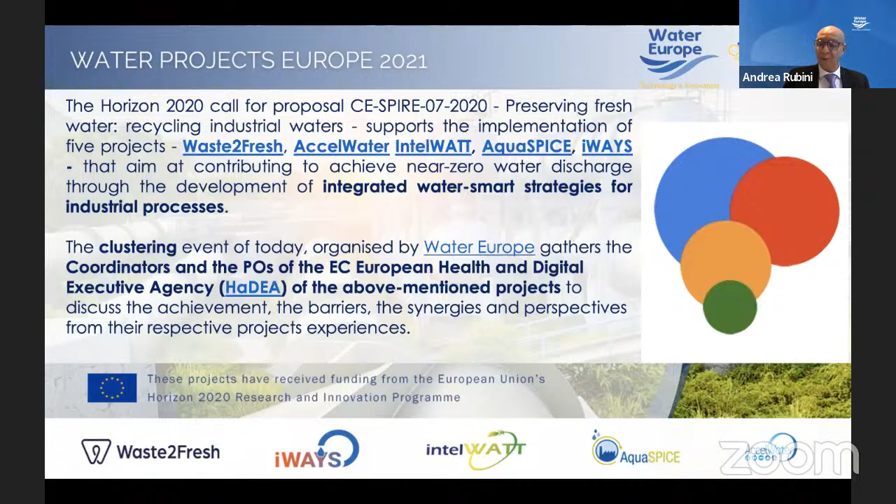This is a snapshot of the speakers that we are going to have today. A very quick tour across the agenda: we have part A, where we introduce the topic, with a presentation from HaDEA and a keynote speech from Ludo Diels. Then we have part B, dedicated to presenting the 5 projects, from AccelWater up to Waste2Fresh. Then we have a final part C, a panel discussion on synergies, common barriers, possible developments, policy implications, and questions and answers that can come from the audience and from all the panelists.

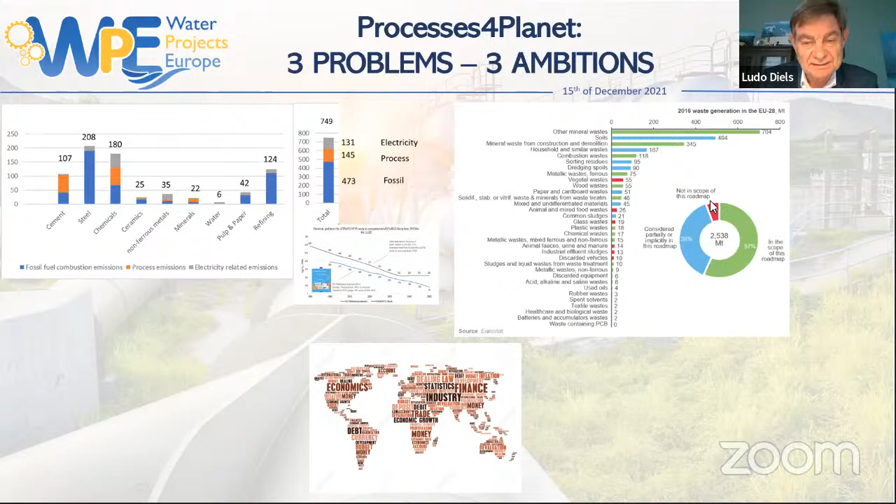The first one is the fact that we, as an energy-intensive industry, are responsible for more than 750 million tons of CO2 in Europe. Our ambition is to bring that to climate neutrality, to completely remove these emissions.

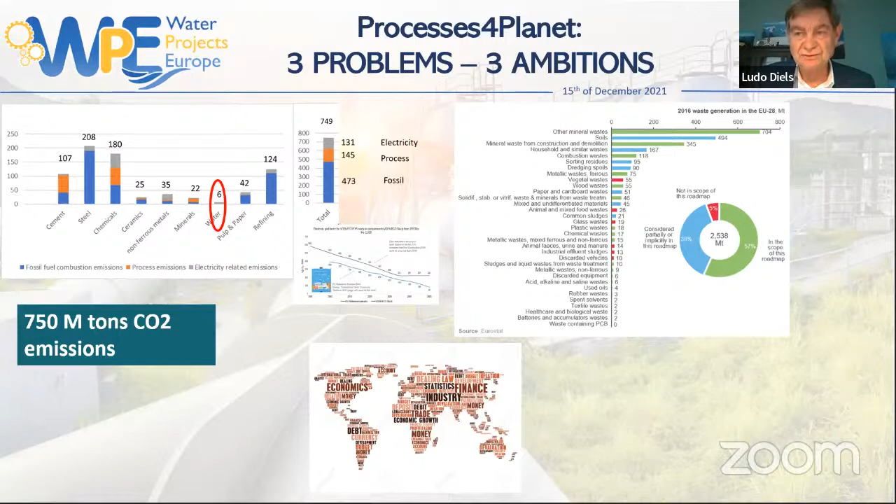When we look to water, this is a tricky calculation, but in our SRIA we have that about 6 million tons of CO2 are linked to the electricity used in water treatment. We also must not forget that in a lot of situations of water treatment, we emit so-called process emissions, producing CO2, nitrous oxide, etc. This is extremely important for us, and in every project we would like focus going both to energy reduction and to changing water treatment so we have fewer emissions.

The second point is that we try to use at least 50 to 60% of the waste generated in Europe as secondary resources for us. It's extremely important that we can use this waste and bring it back as a secondary resource, and not leave it as waste.

Speaking again about water, we have to take into account about 13 million tons of industrial effluent sludges and about 10 million tons of sludges and liquid wastes coming from waste treatment. That's certainly the minimum, but this can be reused either as feedstock for materials, or as feedstock for our energy consumption.

The third ambition is competitiveness. Our ambition is really that we stay competitive during the whole period of this transition, but at the same time that we create gross added value for the process industry that will grow quicker than the EU GDP. So really ambitious - we are not just willing to survive, but really to grow and go for a strong process industry in Europe.

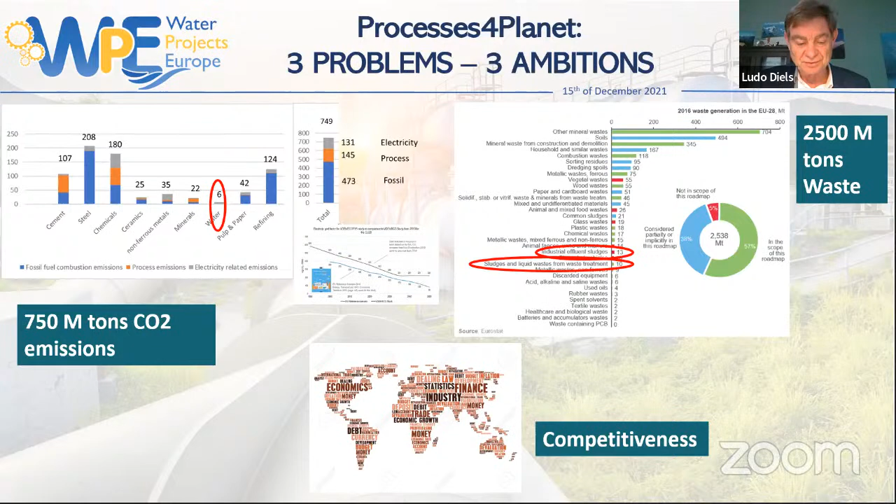When we look at the materials flow in our industry, we see that we use primary resources that, via the process industry, are transformed into materials. This is used by the manufacturing industry to make products, and then as a consumer we bring it to end of life. Then via the recycling industry, it goes back to the process industry as secondary resources. Of course, we interact as a process industry at several levels of this process.

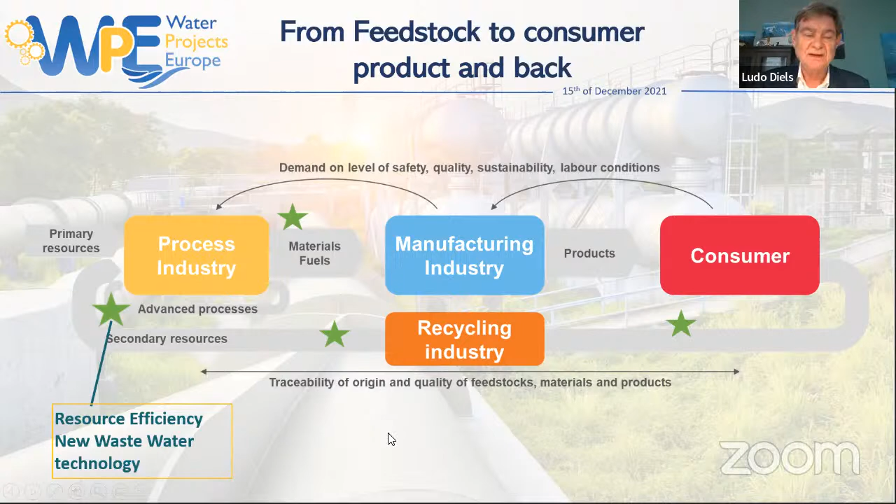Speaking about water, for us the recycling of water in advanced processes with resource efficiency - where we also recover resources, including energy, and try to recycle the water - is most important. Also, secondary resources coming from the recycling industry are in many cases making use of water for cleaning, for washing, etc. We would like to see this link made very strongly so that we can really close this water circle.

If I can translate that into challenges, up to now in water treatment in general we have a lot of attention to oxidative processes, but not that much to reductive processes. And oxidation always needs a lot of energy, so it's certainly a point to take into account.

Up to now, there is still a limited amount of water that is really recycled in process industry. So there's a long way to go, and we really look forward to nice projects where we can improve this potential.

Needless to say, nutrient recovery - for instance phosphorus, due to the scarcity that is coming - but also energy, due to the fact that there is a lot of nitrogen linked to the energy, since we need a lot of energy to make it, is extremely important. In general, I can say that solutes recovery - chemicals, metals, including CRMs, but also salts, etc. - are key if we want to close the circle in a circular economy and keep our feedstocks.

In addition, it's important that we can also remove toxic elements out of the system. We do not want to go to a circular economy where we circulate also the toxic and hazardous compounds. This must go out and go into a safe sink in a certain way, and not be kept anymore in the circular system. Also, fit for use - an expression coming from WSSTP - is really important.

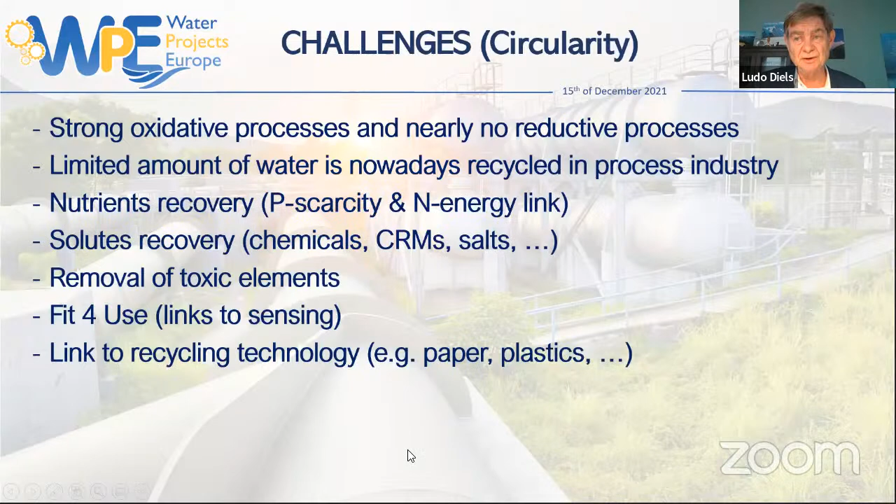We make a lot of links to sensing, to understand what kind of water quality we need in our processes, and to sense the water quality so that we can optimize the treatment according to our processes and avoid risks in the processing itself. And finally, we have a link to recycling industry, for instance in paper recycling, but also in plastics recycling, etc., where a lot of water is or will become used. That really makes sense for us as well.

If we look at energy, of course energy is extremely important for us, but taking into account water, energy efficiency in the processes is of high importance because there we can really make a big difference. In that way, the reuse of excess heat in order to dry, to evaporate water, to increase solubility or whatever, really can make a big difference.

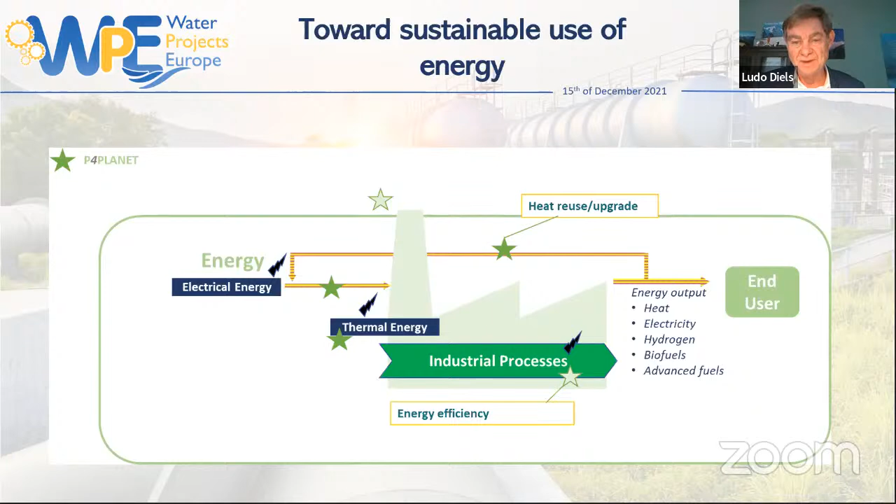Linked to that, more than 6 million tons of CO2 are emitted nowadays due to electricity use. Half is coming from aeration. Oxidation is done with air, which is not at all an energy efficient system. We blow too much air in our wastewater treatment systems, and of course we have a lot of nitrous oxide and CO2 that is emitted.

Again, I'd like to say that up to now we've focused on oxidative processes. This fit-for-use concept is important because there's also a link to energy use in water treatment. Here I'd like to make a case for the water-energy nexus, not only at the level of heat in the water, but also at the level of carbon-related energy. If we just destroy the carbon in the water and don't use it as an energy source, we will need a lot of energy.

We can calculate that we need about 1.5 kilowatt hours to destroy 1 kilogram of COD. You can also reverse it and produce 1.5 kilowatt hours instead. So this really can make a difference. Finally, process efficiency and intensification - for instance energy efficiency, dewatering, etc. - also makes a lot of sense in our different processes.

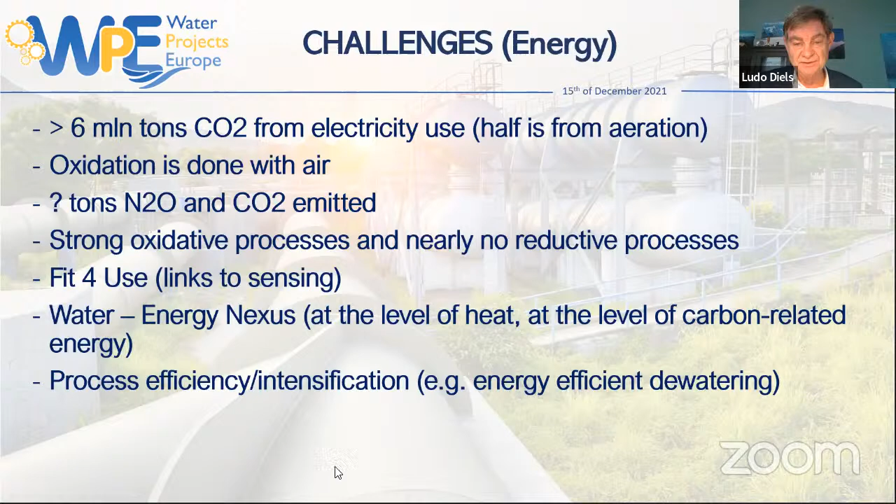As a third point, I'd like to bring up the hubs for circularity. In the hubs for circularity, we try to connect geographically close units to keep resources in the loop as long as possible. For us, that's really the basis of integrated process industry, of integration of all kinds of flows, and among them water is one of the mainstreams, maybe the easiest to keep completely in the system.

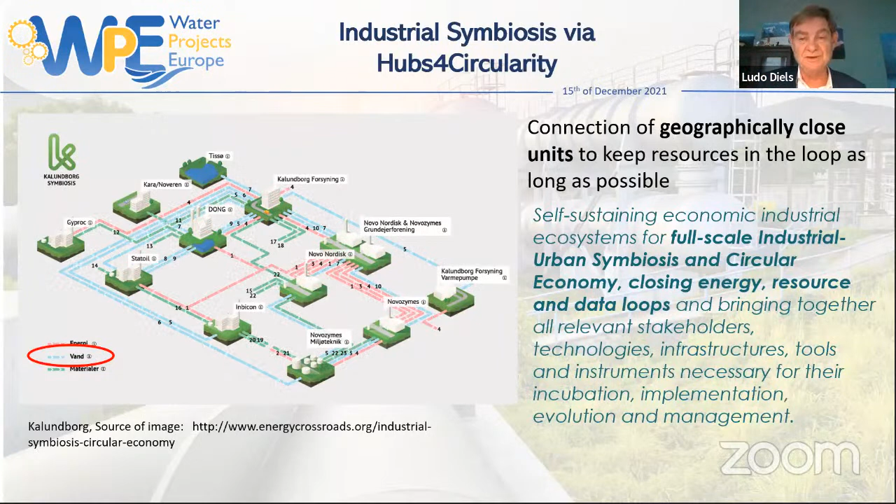With that, I'd like to show that we're not just looking per factory or per plant, but really looking at these integrated systems - industrial symbiosis in a cross-sectorial way, and not only cross-sectorial towards the sectors of P4Planet, but also to manufacturing sectors, recycling sectors, etc., but also the integration with urban industrial symbiosis. That's a point we really want to put forward, where we see a lot of potential to improve, maybe other forms of symbiosis.

The closing of the circle doesn't necessarily mean that we close one process, but that we close it in an integrated way. Of course, we have a strong need for integration with other sectors for waste heat, energy, integration of waste recovery, etc. So it goes further than just the sectors of P4Planet.

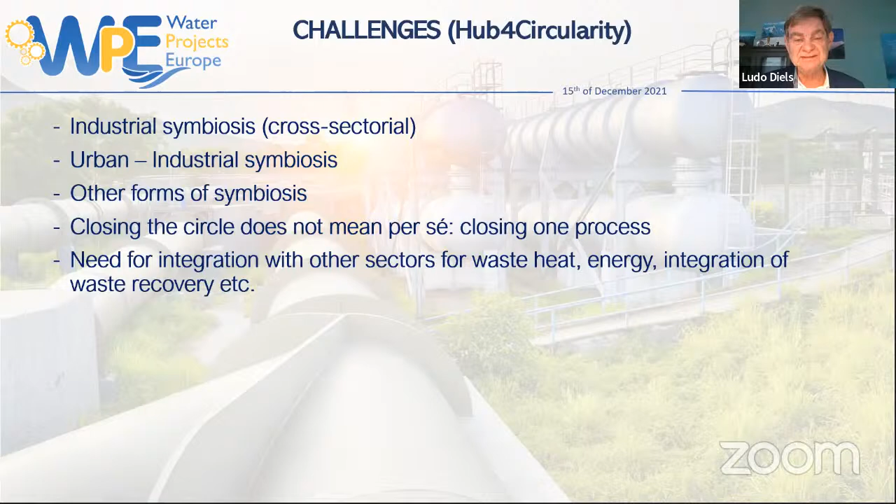Having said that, it's quite important to show you that the different projects now operating under the Spire call are really taking this into account. We see accelerating water circularity, innovative water recovery solutions via recycling of heat materials across different sectors, advancing sustainable and process industry towards digital and circular use innovations. This digital aspect is also extremely important. And intelligent water treatment for water preservation, containing...

...simultaneous energy production and material recovery in energy-intensive industries, and finally smart, innovative systems for recycling of wastewater and creating loops in textile manufacturing. Having said that, you already see we speak a lot about energy-intensive industries, but also food, beverage, textile, which are not sectors of P4Planet, but where we're really also looking at this integration.

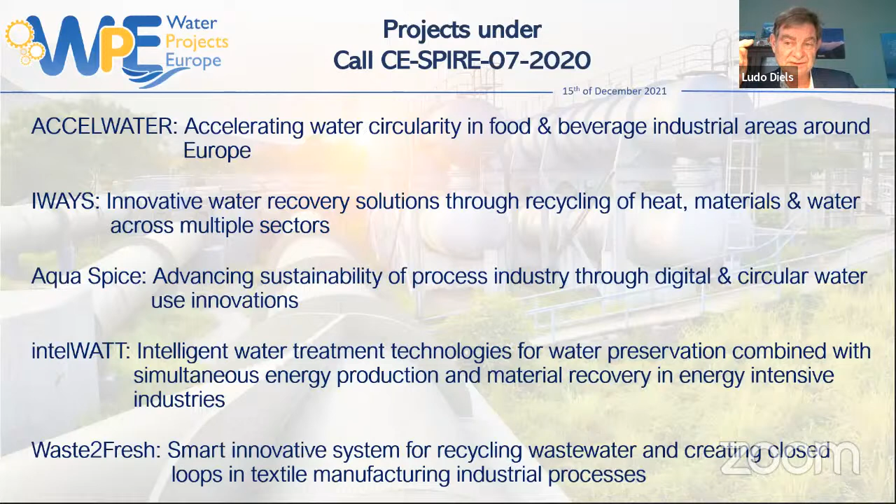Based on that, I can say that we are now preparing the work program 23-24. So for the future, we're still in a very early phase, but I'd like to give you a little glimpse of what we're looking for. We're looking really for sustainable and efficient industrial water consumption with zero pollution goals.

Really, you want to go to zero or near zero pollution, adopting more efficient production processes, with a lot of attention to smart sensing and monitoring. These digital approaches will become very important, including decision support systems for water reuse, risk management models, and recovering energy, nutrients, water, salt, and solutes.

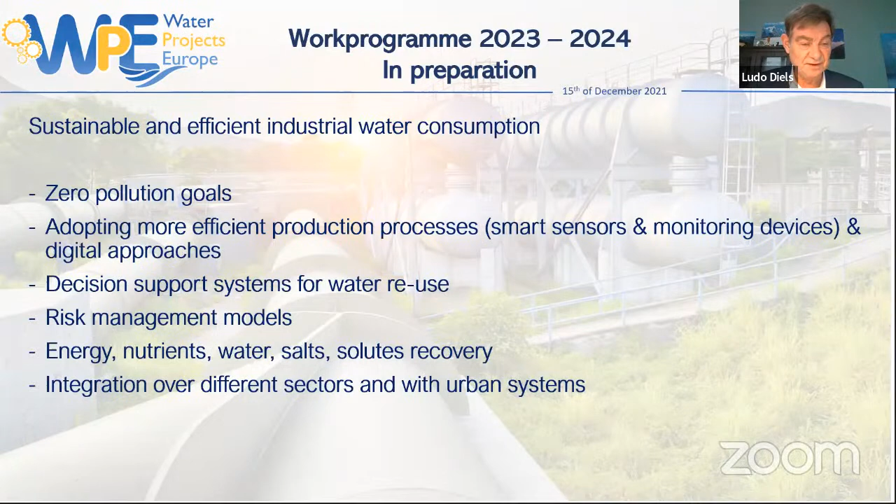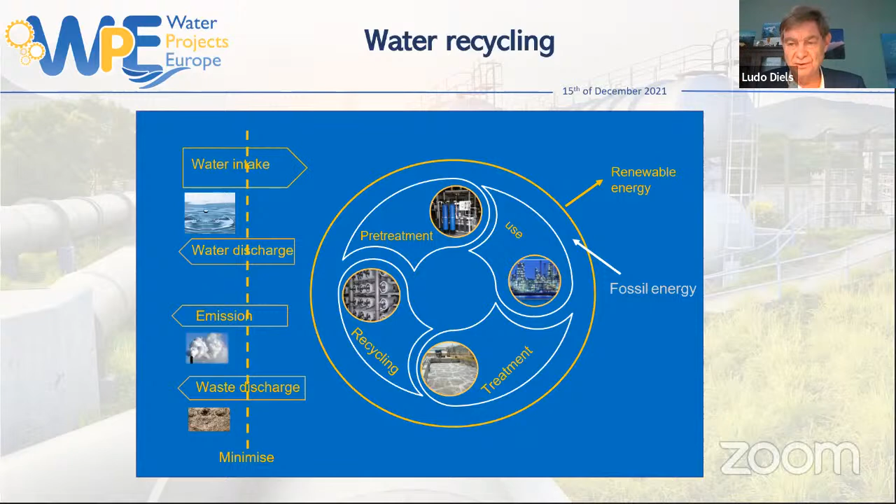Everything we want to recover in order to make our feedstock circles closed. And then we have integration across different sectors, also with urban systems. We want to minimize water intake and water discharge, minimize emissions and waste discharge, and go as much as possible toward renewable energy, reducing the overall energy we will need.

I would like to thank you for your attention, and I would be happy to answer questions or discuss further in the afternoon.

Because we advocate for having a water smart society. In this water smart society, collaboration and synergies is essential, and that's the reason we promote the program for the water-oriented living labs. Thank you so much, Ludo, for your presentation. Thanks a lot - I think there will be questions in the discussion session.

Now we enter into details of the projects, and I'm really happy to call on Tsiropoulos from ACCELWATER, coordinator of ACCELWATER, a project that aims at accelerating water circularity in the food and beverage industries. The floor is yours.

Thank you very much, nice to meet you all. Unfortunately COVID doesn't allow us to make this meeting in a physical way, so we will make it like that. And sorry about the mask, but this is the rules here in Greece that when you're at the company you have to wear your mask. So unfortunately I have to be like that. So let's go to the presentation.

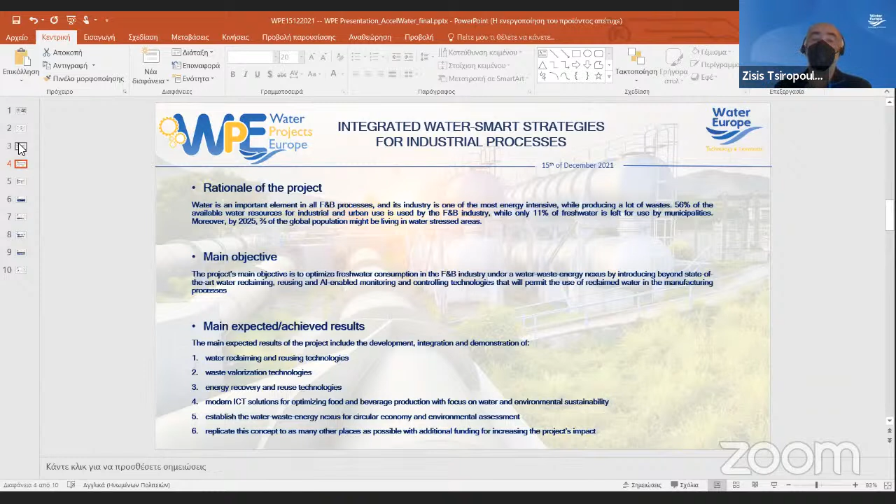We will establish the water-waste-energy nexus for circular economy and environmental assessment of our experiments. If we want to see what we are doing, we have 4 big pilots in 4 European countries.

The biggest pilot is in Greece, where 3 industries are involved: brewery, dairy, and the creation of superfoods. The second pilot is in Spain with a meat processing demonstrator, the third one in Italy with tomato processing demonstrator, and the fourth one in Iceland with fish processing demonstrator.

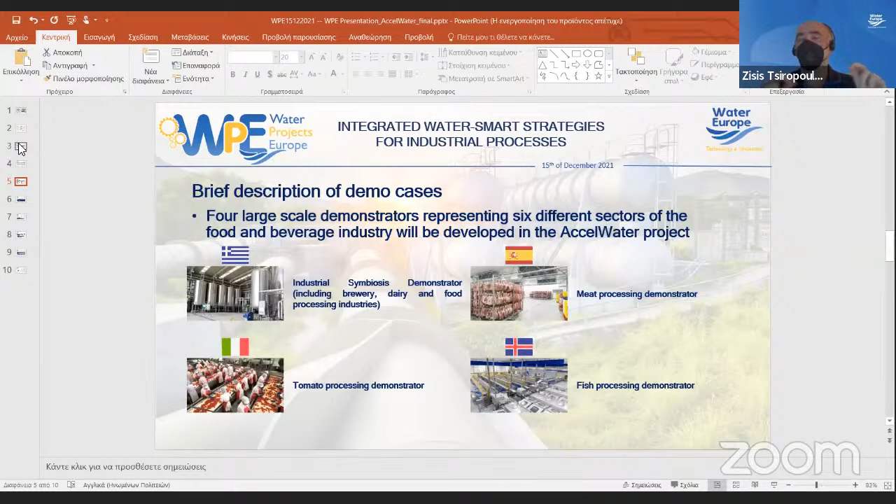We try to have all the types of food and beverage industries into the project, and I think we managed that, because we have 6 different sectors of the food industry.

If we want to see what were the enablers, I think the enablers for going into this project were all the new technologies being created every day. We're using technology for water reclaiming, wastewater management, rainwater harvesting, and for creating energy, etc.

But if I want to speak about the biggest barriers, at least for the Greek side, it's the bureaucracy. The governments are not ready, they didn't predict that such technologies would arise. So when we have to do this or that, we have to get too many agreements from the government in order to apply these technologies, because they don't know what we are speaking of, so they don't trust them.

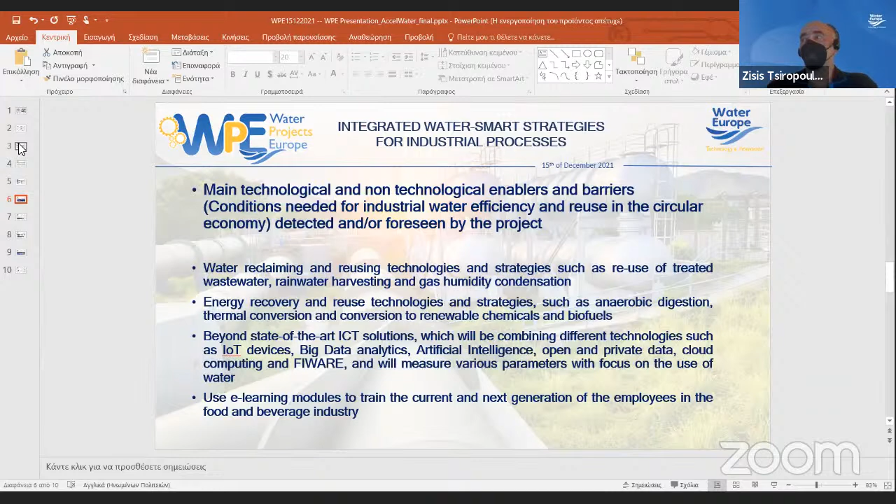They have no clue what will happen. So the difficult barrier for us is to try to convince them that this works and that it has to be included into the national strategy. This happens a lot here in Greece, because we have the biggest site, so we have the most technologies that have to be developed.

Regarding the Green Deal that the European Union wants for 2050, I think the demonstrator targets are water and energy saving, reduction of processing waste and environmental footprint, creation of new products, and many more, but I'll keep it smaller and stay on that.

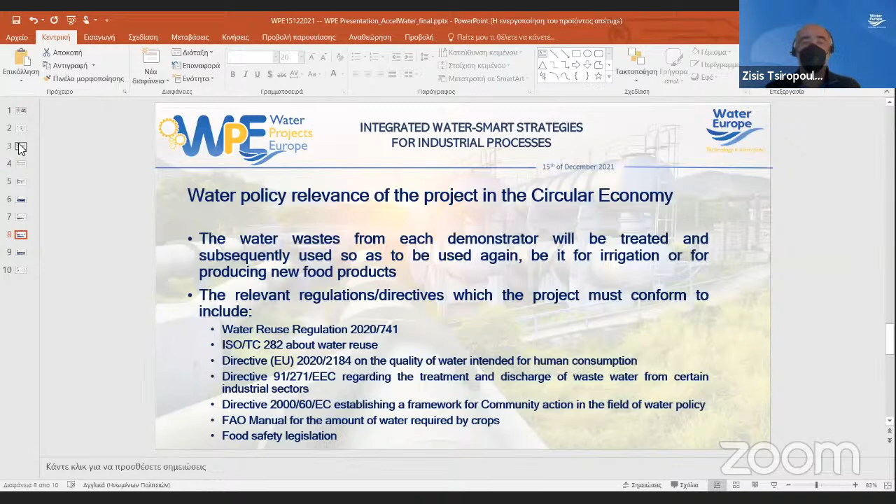These are some of the regulations and directives that we are using in the project. Of course, we have one country outside the European Union, Iceland, so it has some other type of directives and laws, but they are familiar with the European Union ones, so there is no problem there.

If I want to conclude on the project and what we've seen so far, because we are only at the first year, I want to say it's very interesting to see that the industries are very helpful in proceeding with the project and the ideas. They want to see these ideas realized, they want to become more environmentally friendly in general.

Because when you go into a Horizon project, which is mostly for research institutes, and the companies and food industry are not so experienced with that, you believe you will see some barriers. But we saw that the industries are very, very helpful, and they try their best to achieve the best possible result.

Moreover, because in the first year a lot of work was done creating the user requirements, we saw that in the food industry, most of the problems are common across all types of industry.

The third point is that we tried to find a way to optimize the project results and outcomes. We tried, in each country, to have at least one industry and one research institute. This helps the industries have the necessary support for applying these new technologies.

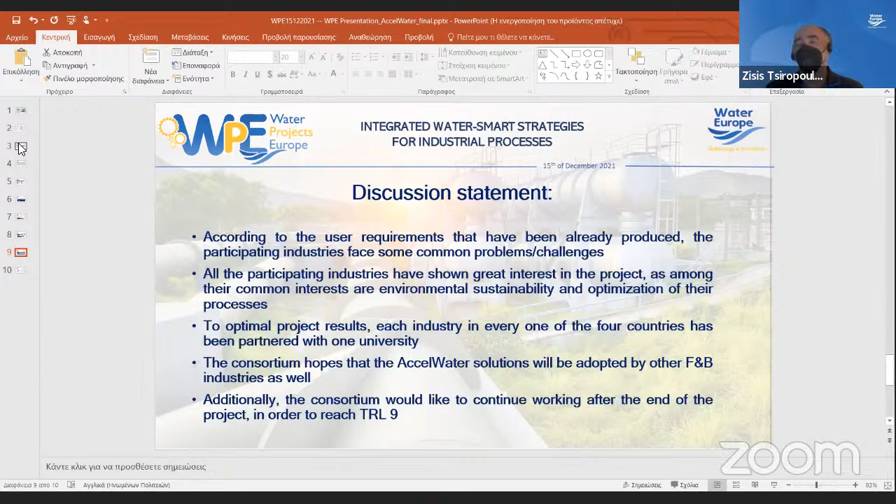That's all for me. I think I was on time, because we have very limited time.

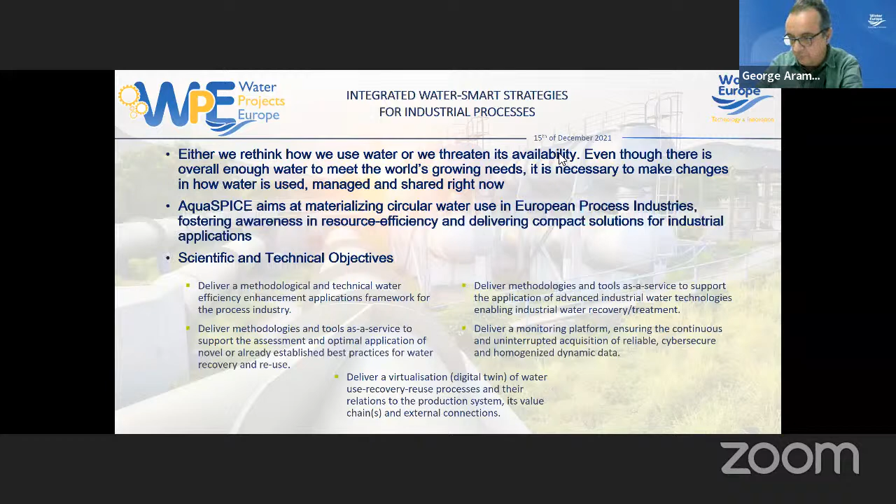AquaSPICE is driven by several business cases in the process industry, and its innovations are focused on the deployment and assessment of state-of-the-art water treatment and recycling technologies and practices, and then the concept of the water cyber-physical system, explained later in 6 case studies.

The first case study corresponds to 2 industrial sites of Dow Chemicals, one in Böhlen, Germany, and the other one in Terneuzen, Netherlands. This case mainly focuses on technological innovation for freshwater reduction.

The second case is in the peroxide production unit in Solvay, Italy. This is also a very interesting case because it also engages the local municipality and the consortium Aretusa wastewater reclamation plant, and there are actors behind that. So it's a case study which has a systemic view of the water management situation.

The third case study corresponds to the sustainable and robust water management in BASF, located in the industrial zones of Antwerp.

And it also has two sub-cases: one having the objective of reducing freshwater intake for demineralized water production, and the second one about real-time water quality, mainly salinity monitoring and control of the different water sources.

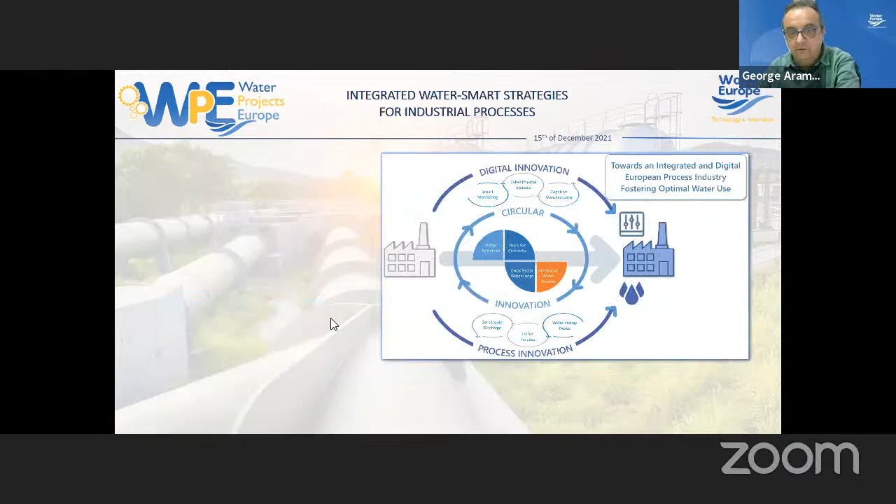AquaSPICE, as I said before, develops, integrates, demonstrates, and offers innovations in three different pillars: circular, process, and digital innovation. Process innovation corresponds to a set of advanced technologies and practices combining energy and substance recovery, where they are installed, operated, and assessed within AquaSPICE case studies.

The circular innovation is also very important, where closed loops, including the water reuse option at different levels—I'll explain that a bit later—in processing factory, industrial symbiosis, cross-sectorial cases, those closed loops are established and assessed.

It also offers digital innovation, where the novel concept of a water-specific cyber-physical system, which we call water CPS, is developed, synthesizing digital twins of the industrial value chains and of the entities for advanced water-saving technologies. Water CPS and digital innovation bring cognitive manufacturing methods and tools to the water domain.

The example developed in other cases brings this cognitive manufacturing for detecting non-optimal water reuse dynamically, leading to dynamic process adaptation.

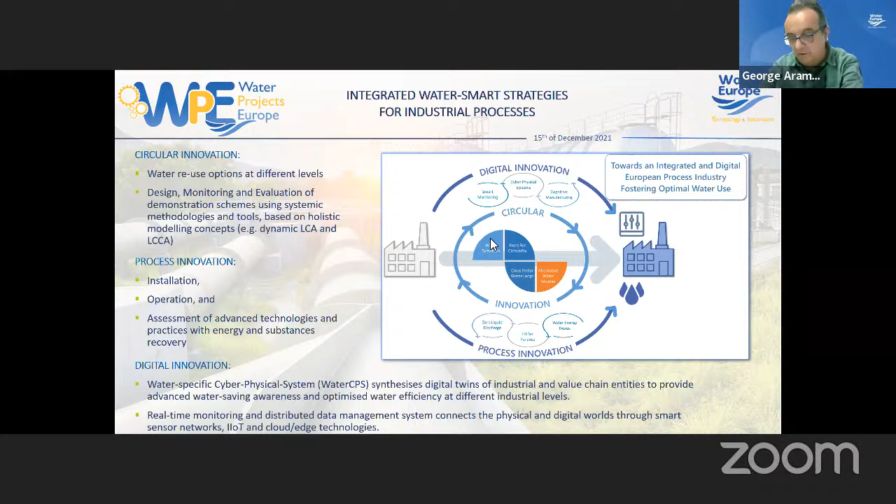Also underlying the water CPS, there is a real-time monitoring platform that connects the physical to the digital world through smart sensors, IoT devices, edge technologies, and all these things.

Some specific outcomes from AquaSPICE include contemporary water reuse practices and technologies, flexible decision support methodologies to assist in selecting, configuring, and optimizing fit-for-purpose treatment technologies, and assessment using different indicators such as water footprint, embodied energy, carbon footprint, etc.

Methodologies and tools to evaluate and monitor water symbiosis, because of the symbiotic actions there. Methodologies for more systemic analysis, including a novel dynamic life cycle assessment and cost assessment—dynamic meaning based on data that comes from the real-time monitoring platform and sensors, in a dynamic manner, not a static one.

In AquaSPICE, new business models are also offered, or will be offered, as we're still at the beginning of the project. There's a flexible real-time monitoring platform, and also the innovative water CPS, focusing mainly on the efficiency of water—that's what distinguishes the cyber-physical system.

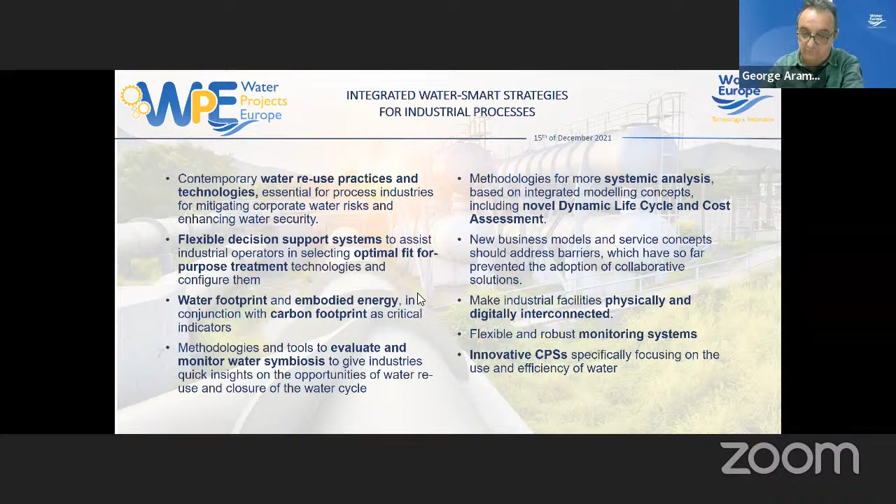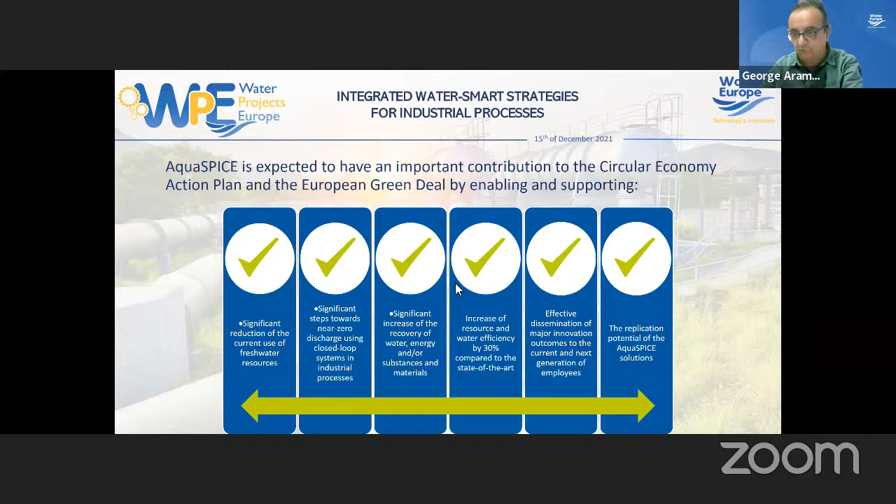Now, something about the circular economy and circular aspect of AquaSPICE. I mentioned before that AquaSPICE follows a systemic approach in water management and water efficiency, and this approach and efficiency can be achieved through adaptation of technologies and practices at different levels.

On the entire factory, as in case study 3, BASF in Port of Antwerp; in collaboration with other industries in an industrial symbiosis manner, as in JEMS in Slovenia, in symbiotic action with Agricola, as I presented before; and also in symbiotic actions with local industries that produce construction materials, where they use the slags.

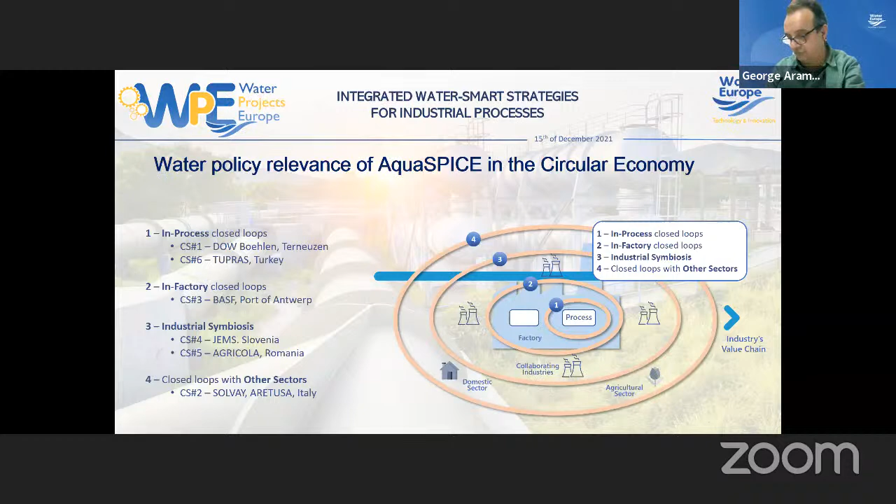Finishing my presentation, just a few statements, but also some outcomes that came during the first years of this project: the challenges are manifold and comprise improved utilization of advanced treatment options, including innovative biological process and membrane separation techniques to remove a broad range of pollutants. This is an outcome from the technological part, the process innovation, as I mentioned before.

The digital solutions may have to be developed and tested based on process models before they can be employed at full scale. Now we are exactly in this stage, and also in the stage where the real-time monitoring platform has been developed and will be deployed soon. Building digital twins of the industrial systems can help. It's important that we realize this, to appropriately assess the different intervention options in technical, economical, and ecological terms.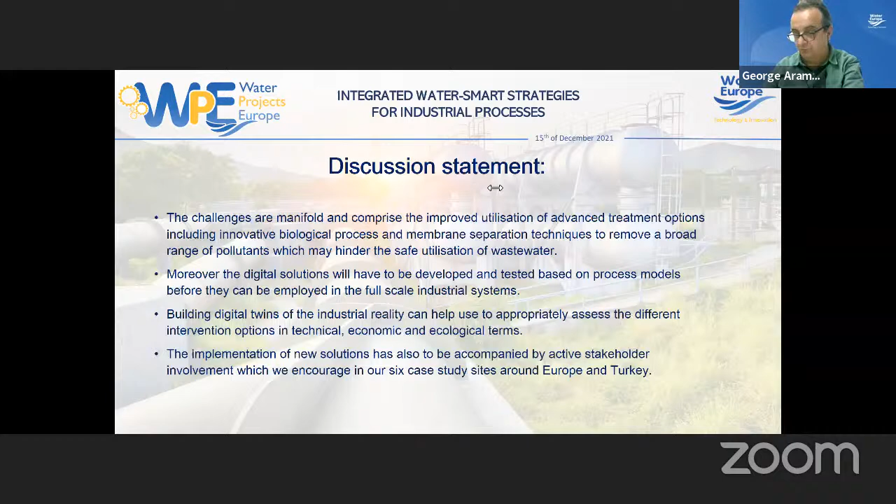What is important for this case, and I'm sure for other cases and projects, is that the implementation of all these solutions has to be accompanied by stakeholder involvement. This has been encouraged in all 6 case studies in AquaSPICE around Europe and Turkey. This is from my part. Thank you very much, and if there are any questions or discussion, we can do that later.

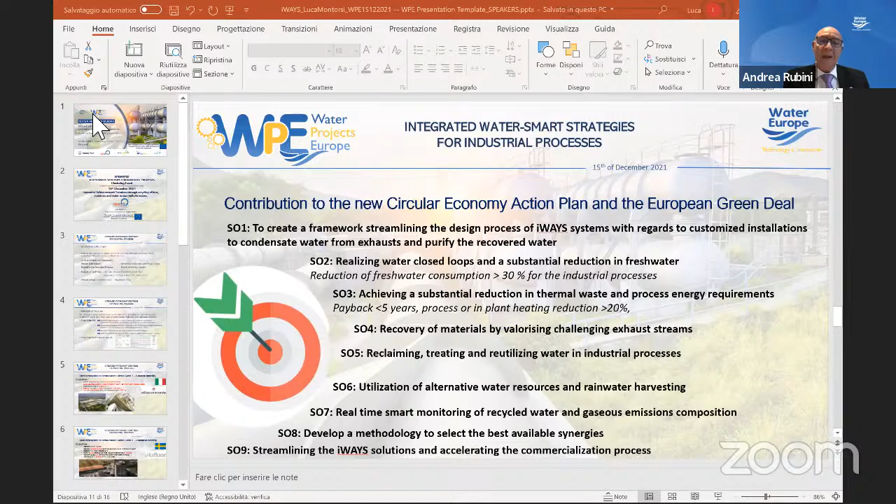Thank you very much, George. A real pleasure to learn from your project, from AquaSPICE. Now we have another project which is particularly important, which is iWAYS. This is a project where Water Europe participates, and it is under this project that Water Europe basically organized this clustering activity. I'm more than happy to see again, this time digitally, Luca Montorsi. We met during the last project meeting in Spain. Give us the insight of this project; we are going to listen to you. Thank you very much, Andrea, for the introduction, and thank you for inviting me to this event and for organizing it.

iWAYS project. My name is Luca Montorsi, and these are the main figures of the project. The project title is Innovative Water Recovery Solutions through Recycling of Heat, Materials, and Water across multiple sectors. The project coordinator is the University of Modena Reggio Emilia in Italy. We also have a scientific and technical director from Brunel University London. The budget of the project is close to 13 million euro, and the granted contribution was 10.6 million euro. The project will last four years, starting from December 2020.

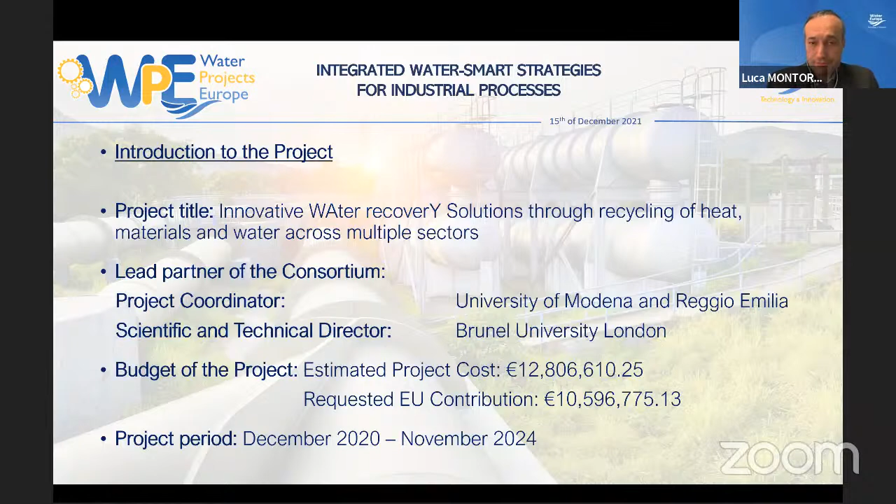The main rationale of the project is to develop a set of technologies and systems for industrial processes in order to recover water, heat, and possibly materials from exhaust streams. So we are addressing challenging exhaust gaseous streams, and we aim at recovering water, heat, and materials. In order to do that, we are going to realize water closed loops that will allow the reduction of fresh water consumption.

We are also recovering thermal energy from the gaseous waste streams, and that energy will be reused in the industrial process, so we are aiming at reducing the energy consumption of the industrial processes. We are also aiming at recovering materials from the waste streams. Some substances can be condensed and removed from the condensate and reused in the industrial process, or they are a commodity that can be sold.

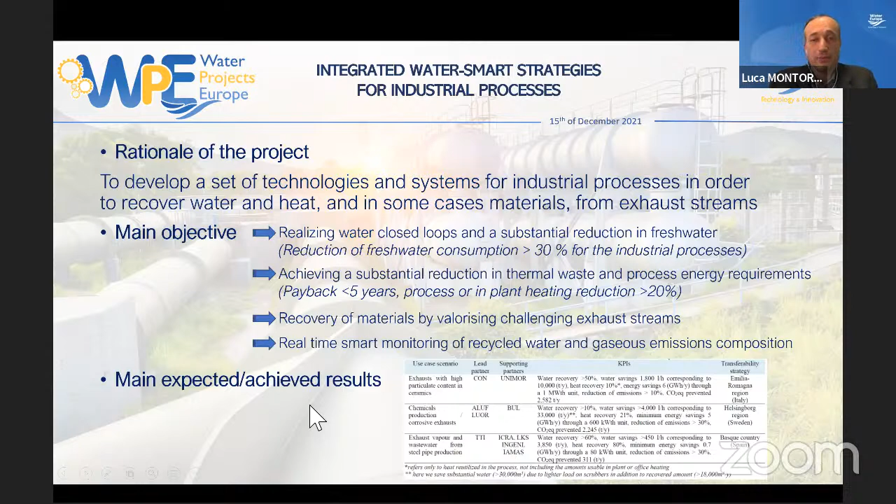We are also aiming at developing a real-time smart monitoring system for the gaseous emissions of the waste stream addressed by the project. We have 3 main demo cases, and we are going through them now. These are the objectives for the first demo case, which is located in Italy. It is a ceramic industry, and we are aiming at condensing water and recovering heat from the spray dryer exhaust gases.

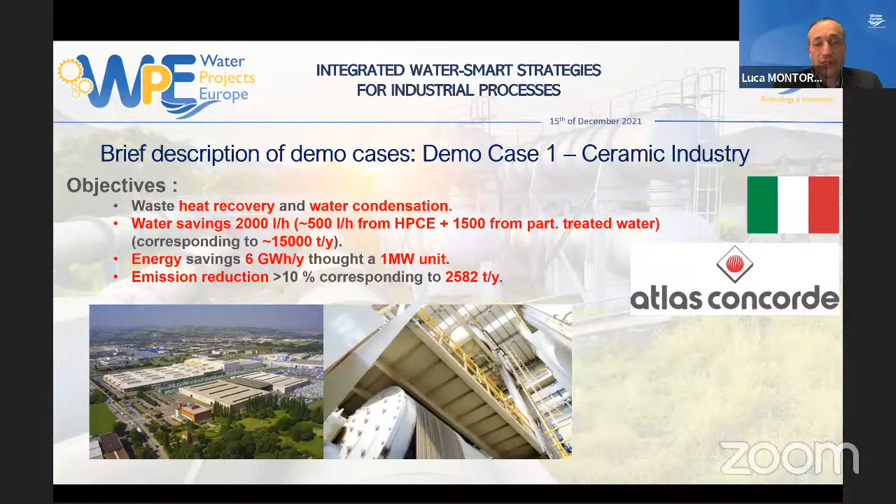The condensate from the exhaust gases will be approximately 500 liters per hour, but we are also aiming at repowering the wastewater treatment of the factory, which will lead to purifying an additional 1.5 tons of water per hour. We are aiming at saving 15,000 tons of water each year, while recovering 6 gigawatt-hours per year of energy. This will also lead to a reduction of emissions corresponding to 2,500 tons per year of CO2.

The second demo case of the project will be Alufluor, which is a chemical industry in Sweden. This is a very challenging demo case because of the corrosive nature of the exhaust gases. They are producing aluminum fluoride, and the exhaust gases in the production process are very corrosive. We are aiming at recovering the water content in the exhaust stream, along with the other substances usually contained in this exhaust stream.

And thus we are also recovering substances that can be sold by Alufluor because they are a product for them. By doing this, we are also recovering thermal power. We are aiming at 500 kilowatt thermal power recovery with a total energy recovery of 5.2 gigawatt hour. Just to give you an idea, we are aiming at recovering 70 tons of acid per year instead of releasing it into the atmosphere.

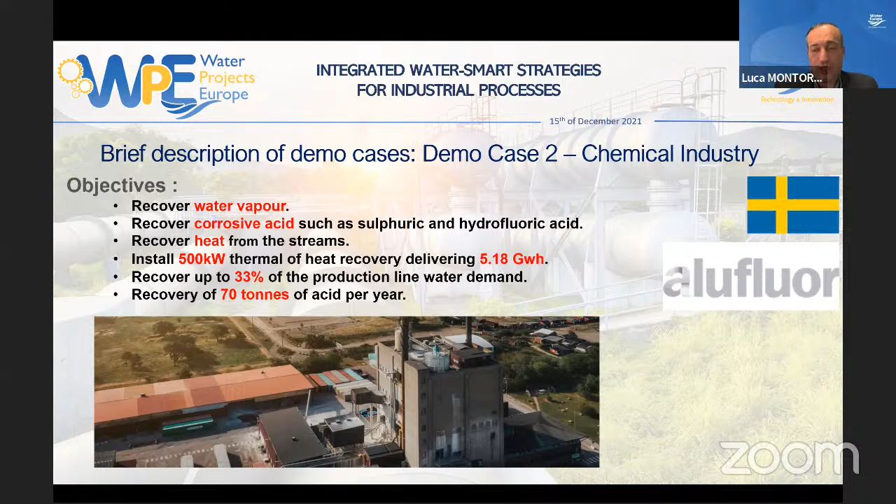The third demo case is located in Spain. It is a steel industry, and this is a very challenging demo case because of the industrial process. We are aiming to recover the water and the heat from the hot temperature tubes quenching process. So it is a very difficult system where we can locate a heat exchanger and develop a technology for recovering both heat and water.

The recovery of heat and water will be coupled with a treatment system for the sludge they are having right now in the plant, and thus we are aiming at reducing the final disposal of material.

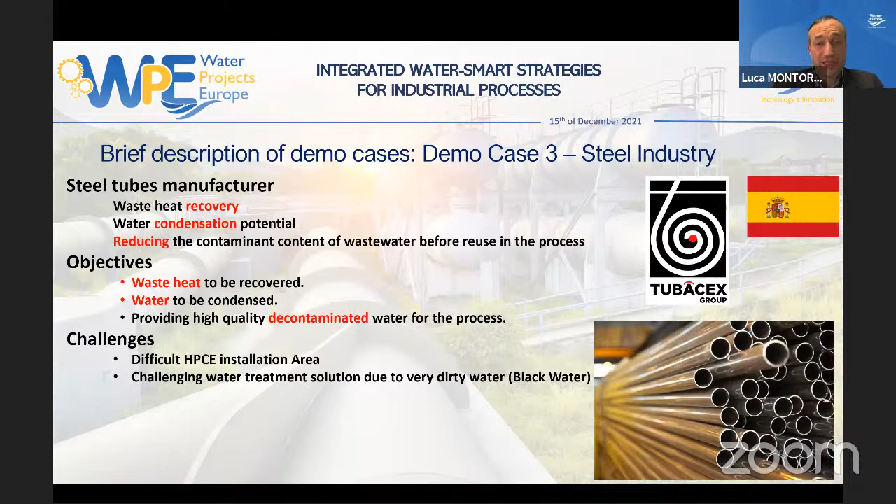The main technologies that we are going to develop within the project concern three areas. The first one is referring to heat recovery, and we are going to use a heat pipe condensing economizer in order to recover heat from the gaseous exhaust stream and condense the substances within the exhaust stream.

For example, here we have a schematic of the heat pipe condensing economizer with different sections. Each section will be characterized by a different temperature of the exhaust gases. So the exhaust gases will reach different temperatures along the heat pipe condensing economizer, and that will allow condensing water and the substances in different sections, so we can more easily recover them.

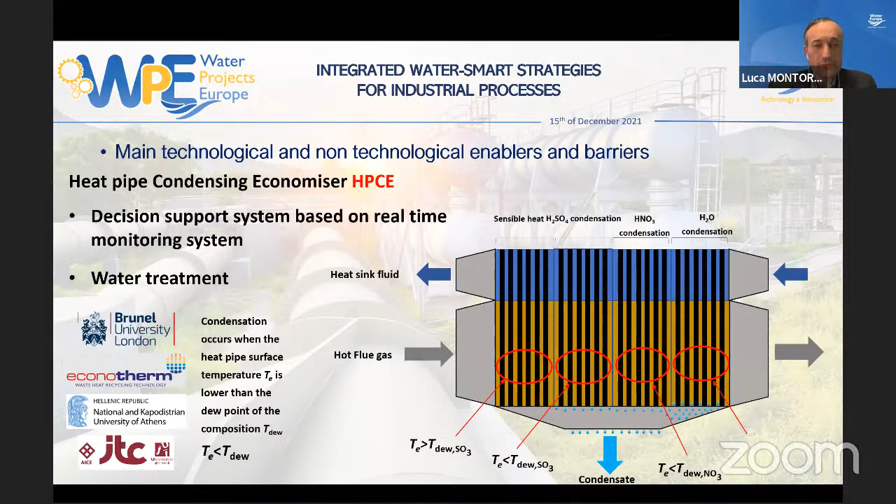The recovered water and recovered substances will be treated in order to purify the water and to recover the substances in the condensate. We are going to use different technologies for the water treatment. Some of them are more established from a technological point of view, while other technologies have a lower TRL.

For example, the photocatalytic nanofiltration system has a lower TRL compared to the other technologies, and that system will be tested in a real industrial environment, specifically in the steel industry.

The other treatments, as I said, are better known, such as reverse osmosis or ultrafiltration, but we are going to use this kind of technologies in industrial sectors where nowadays they are not usually adopted, and that will enable us to increase the potential of the water treatment for those industries.

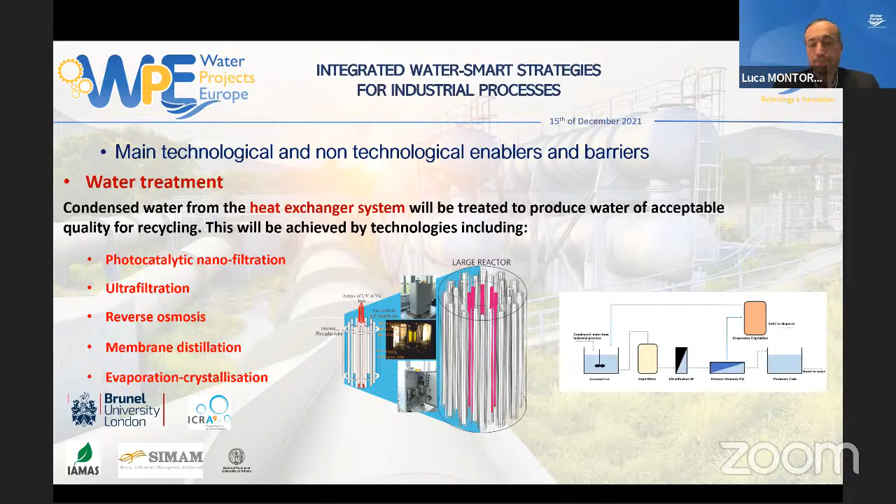The third area where iWAYS is focusing is the real-time monitoring of the industrial process. So we are going to develop a decision support system based on real-time monitoring of the industrial process we are addressing. We are going to investigate the sensors that have to be installed in order to have a better view of the industrial processes, and the sensors will provide the data.

That data will be fed to the decision support system, and that system will enable us to take better decisions, to forecast possible problems of the industrial process, so we can take action in advance before the problem becomes more serious.

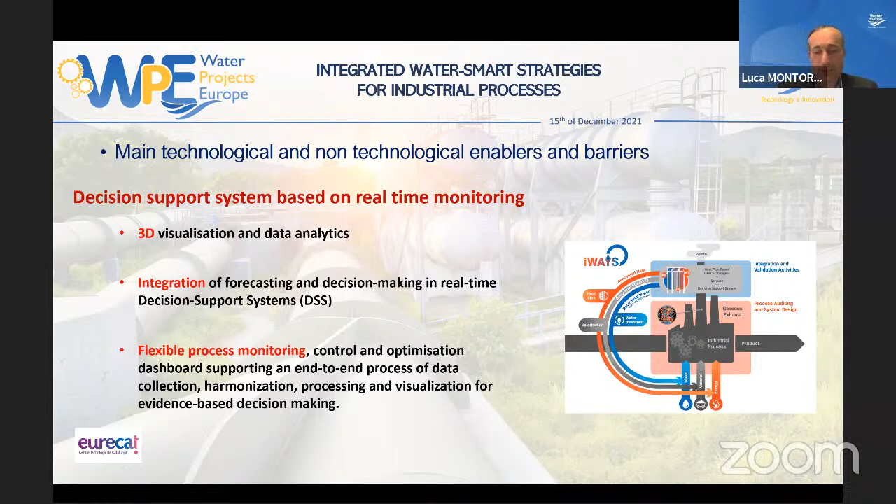Furthermore, this decision support system will also enable a finer tuning of the industrial process, so we can control it better and optimize it, reducing the energy consumption and water consumption of the system.

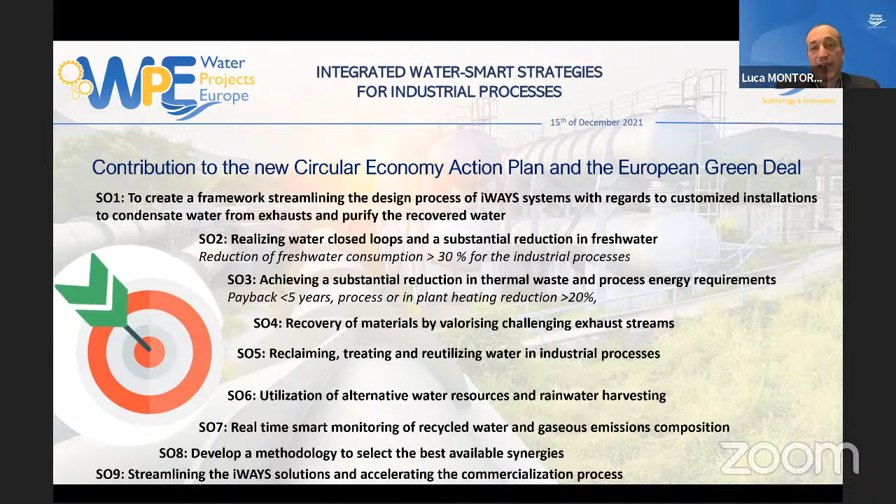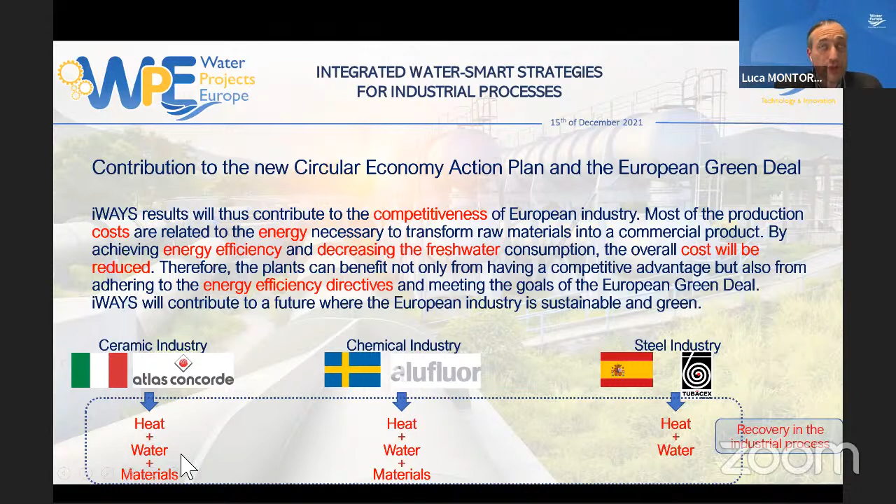So I think that these goals will all move towards a circular economy, and they are compliant with the European Green Deal. By means of the iWAYS project, we are aiming at increasing the competitiveness of the European industry by reducing the energy consumption and water consumption of industrial processes, and enabling circular economy for the industrial processes, because we are going to reuse in the same industrial process the recovered heat, the recovered water, and when possible also the recovered material.

These are the directives that are directly linked with the project and with the topics we are working on. And the circular economy is an important topic within the project.

We have a dedicated task for the circular economy for enabling the water waste energy nexus. So we are going to develop a unified cross-sectorial circularity model, which will be used not only to define the best strategies for that single industrial process, but it will also enable us to investigate possible synergies for different sectors, so we can couple different sectors, different industries, in order to reduce the energy consumption and the water consumption.

So what we recover from one industrial process can be reused in a different industrial process in an industry nearby, where we are recovering the heat, where we are recovering the water. And it will also be used to show different industrial actors or other stakeholders the potential of the water waste energy nexus.

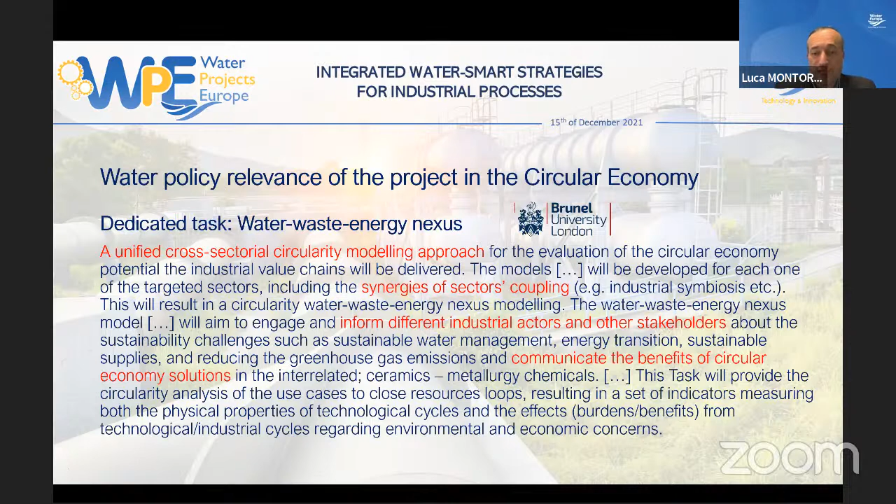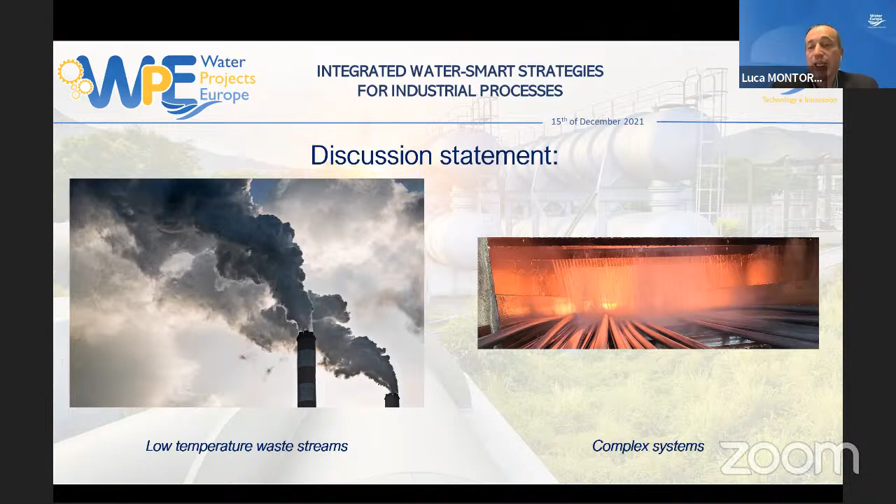Also after the iWAYS project, in order to recover heat from low temperature waste streams, and to recover heat and water from a complex system where it is difficult to build a heat exchanger, and it is difficult to recover the water content from the exhaust stream.

This is all from my end. I would like to thank you very much for your attention.

Many thanks, Luca, for your presentation. By the way, I think that you have seen that I skipped the coffee break. I saw you with plenty of stamina, and then I said, okay, let's go ahead and keep the attention high on the presentations and on the contents of this great, excellent opportunity that we have together to have all these 5 projects really gathering around the issue of how to effectively manage water for our society.

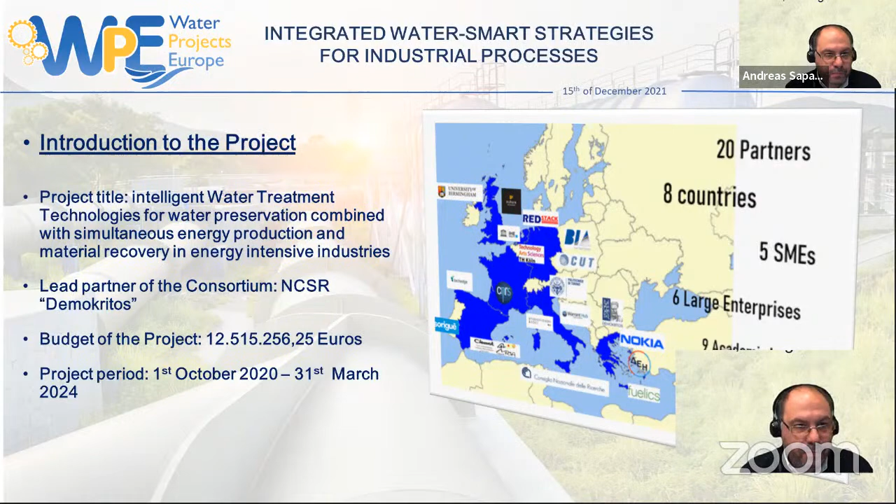The rationale, the general concept of the project, is to effectively integrate wastewater treatment processes with intelligent decision-making mechanisms, and to demonstrate these solutions in a series of case studies in industrial environments. The proposed processes will be able to adapt and adjust the treatment conditions in order to minimize energy consumption while intensifying the volume production of reusable water.

The main objective of the intelWATT project is, of course, to validate at technology readiness level 7 to 8 innovative and intelligent water treatment technologies combining freshwater preservation with resources recovery and energy conversion, based on a circular economy concept. This will be demonstrated through 3 different case studies in representative energy-intensive industrial activities, namely power generation, mining, and electroplating.

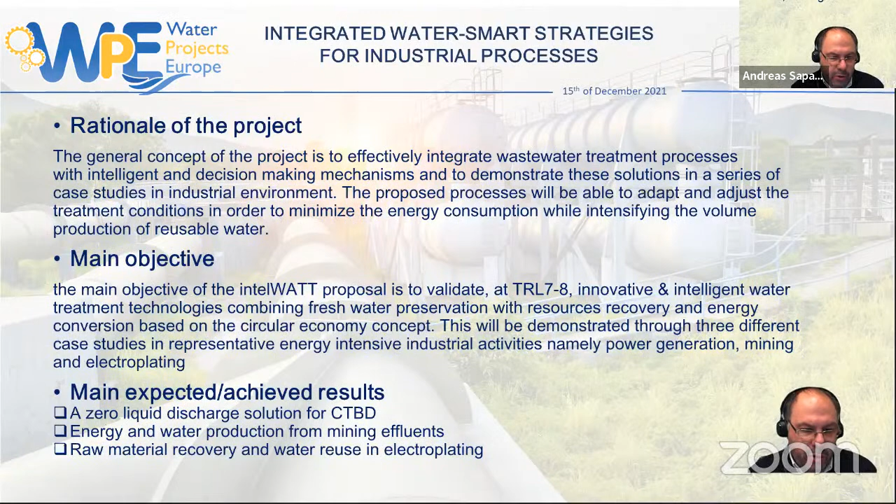So very briefly, the main expected results at the end of the project will be a zero liquid discharge solution for cooling tower blowdown, energy and water production from mining effluents, and raw material recovery and water reuse in electroplating.

To introduce our case studies, case study number 1 will be hosted by the Public Power Corporation in Greece in a thermoelectric power plant. It's an 800 megawatt combined cycle natural gas power plant, and our goal is to demonstrate and evaluate at TRL 7, which for us means 100 cubic meters per day, a novel intelligent process aiming at at least 99% recovery of the cooling tower blowdown.

You can see the sketch of the cooling tower and how it looks in reality, where it's placed in the plant. To give you an idea about the amount of water a thermoelectric power plant uses, the total water circulating flow capacity is 37,000 cubic meters per hour, while the blowdown, which is eventually led to wastewater treatment and then discarded, is roughly 170 cubic meters per hour. So the water preservation potential here exceeds 1 million cubic meters per year, equivalent to the consumption of 35,000 people per year.

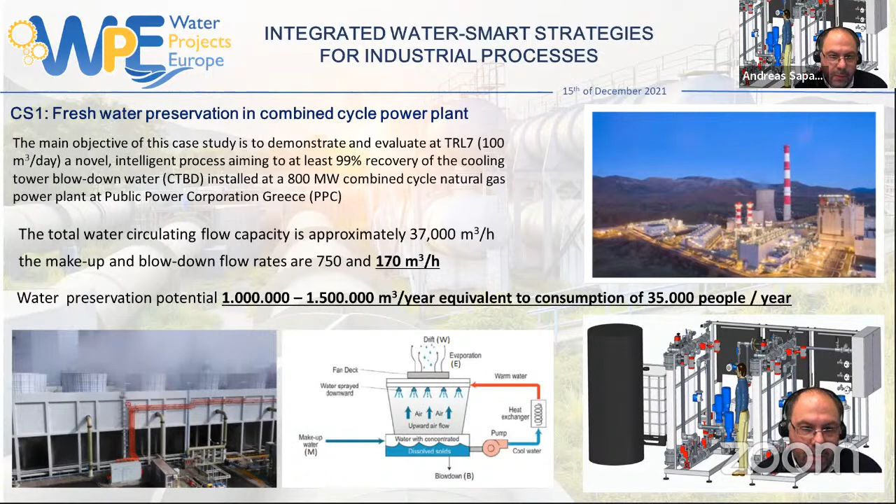Our second case study is a hybrid process for water recovery and energy harvesting from industrial brines. This is a very complex and very interesting case study for us. We are dealing with a very large environmental issue that occurs next to Barcelona.

You can see in the schematic on the bottom of the page, mining effluents coming from potash mining, maybe from the early 1900s, led to a high salinization of the Llobregat River, which eventually led to a very high societal and environmental problem. There's a nice presentation in a video we have prepared for you. It's not easy for me to share it now, but if you press this link, you will be able to see the problem and how it's dealt with at the moment.

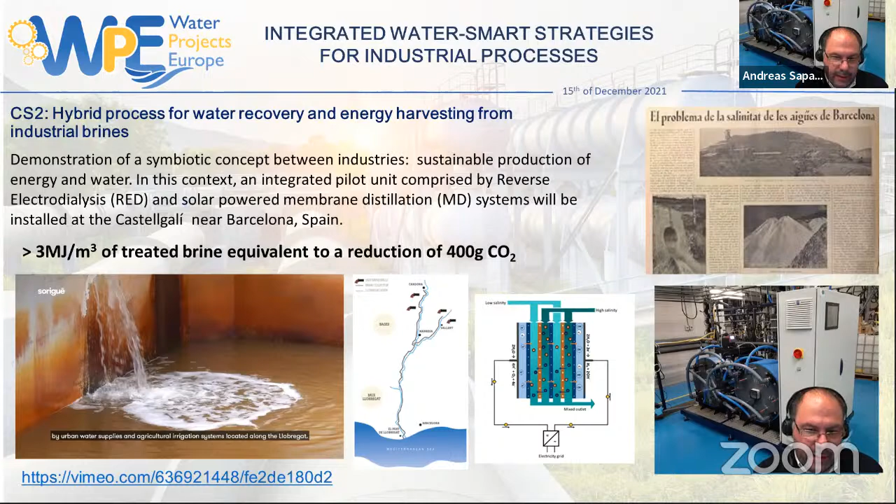Our solution is to harvest energy from the salinity gradient. We can take advantage of these very high salinity brines that originate from mining activities, introducing a reverse electrodialysis solution. We will be able to produce more than 3 megajoules per cubic meter of treated brine, producing electricity. This is equivalent to a reduction of 400 grams of CO2 for each cubic meter of brine treated in our case study.

Our case study number 3 has to do with electroplating, especially plastic electroplating. As you can see on the right of the image, we are dealing mostly with parts directed to the automotive industry. All this very nice shiny stuff we have on our cars starts its life as probably dull white or black plastic, but after a series of treatments, they become these very nice shiny items that we are very fond of having in our cars.

In order to do so, a series of electroplating baths are implemented, usually using copper, nickel, and chromium to achieve this finish. The main problem arising from this process is that after each metal is deposited on these parts, a series of rinses need to be done, and these rinses after a while become more or less contaminated, so this water needs to be treated somehow.

This is where we will intervene. We will develop a technology and a pilot process with capacity to treat rinse water around 2.5 cubic meters per hour. Our goal is to reduce the consumption of fresh water by 65%, and reclaim and reuse 95% of copper and chromium and at least 50% of nickel of the electrolytes. The significance of this technology is not only economic, it's environmental, and has a lot of other implications.

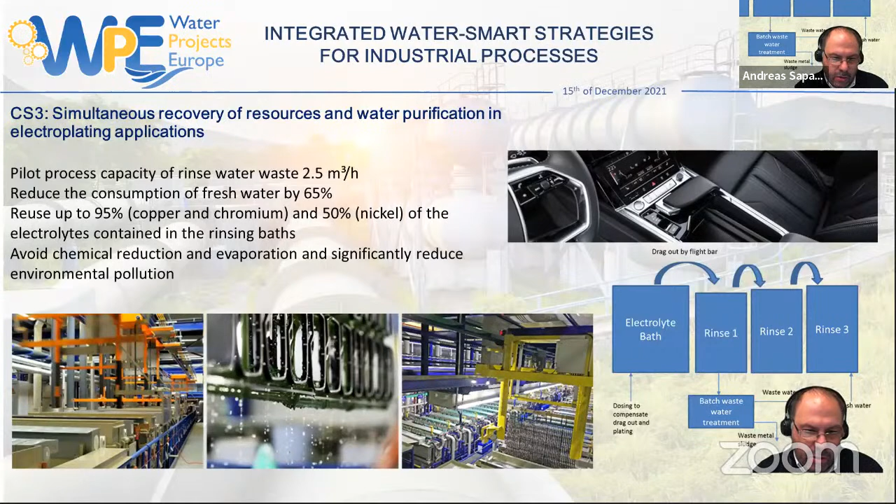So, like food for thought, technological and non-technological enablers and barriers. Of course, when we are talking about wastewater treatment, the first word that comes to mind for every industrial partner is the cost of treatment. Compared to existing wastewater treatment, the cost is relatively high, and we always need to express it as kilowatt hours per cubic meter treated.

What needs to be done is the seamless integration of the proposed solution into existing processes, and this again needs to be done through smart monitoring. As previously said, legislation is the main issue, the obligation for action. If there is no obligation to do it, probably a company won't do it. We think motivation for the adoption of non-proven technologies at the research and development stage might also be very interesting, and the knowledge transfer to interested parties needs to be enhanced.

Every project follow-up on upscaling and replication needs to be more easily accessed, as well as public access to proof of concept demonstrators.

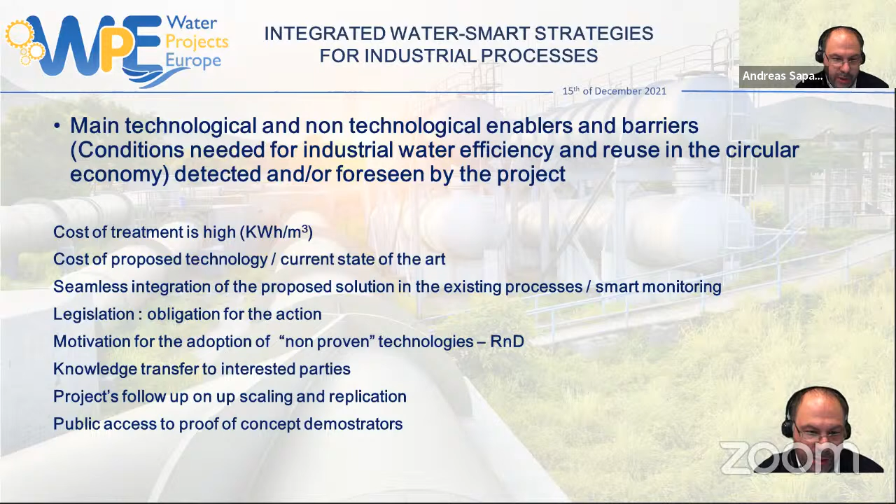And water policy relevance. After a bit of thought, we think these three quotes, articles from European directive and legislation, express us very well: that water is not a commercial product, that the water resources of the Union are increasingly coming under pressure, and that the aim is to achieve the elimination of hazardous substances being effluent into the marine ecosystem.

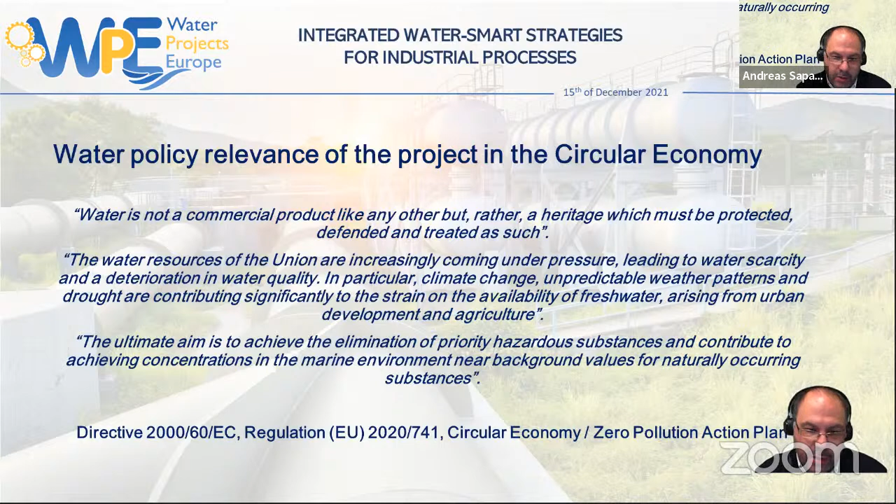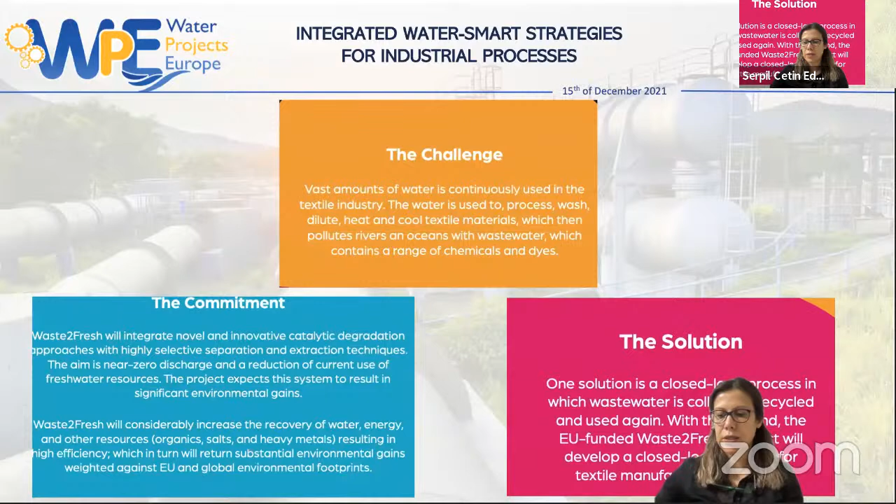Our main objective is to develop and demonstrate a closed loop recycling system for dye wastewater from textile manufacturing factories by integrating novel catalytic degradation approaches with highly selective separation and extraction techniques, which will assure near zero discharge, reduce current use of freshwater resources, and increase the recovery of water, energy, and other resources. The main expected result of Waste to Fresh is to provide a modular closed loop, near zero discharge industrial water recycling system for textile and energy intensive process operations across Europe and worldwide, which will increase resource and water efficiency up to 30% compared to the current state of the art.

The outputs of related work packages within Waste to Fresh will feed into a front-end engineering design of a large-scale prototype system that will be built and demonstrated at Erak Denim Factory, one of our partners located in Turkey - you may have heard of its brand name, Mavi Jeans. For the treatment and recycling of wastewater using this closed loop system, prior to assembly and demonstration of the large-scale prototype, which we aim to achieve at TRL7, the subsystems will be integrated and demonstrated into a relevant environment with wastewater from the Erak Denim Factory.

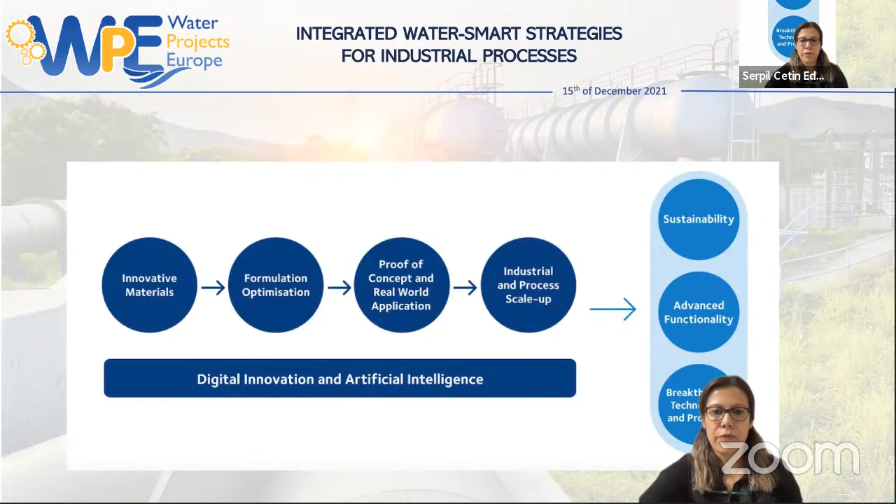The performance data from the small-scale prototype demonstration will be used to validate the techno-economic and sustainability targets derived from life cycle assessment and life cycle cost analysis, and if necessary, optimize the large-scale prototype design ahead of its assembly and demonstration at Erak. The large-scale prototype system will include real-time monitoring and an artificial intelligence enabled monitoring system, demonstrated to generate performance data that will feed into the LCA and LCCA models and a package for a future commercial system. The large-scale prototype will treat 40 cubic meters of wastewater from 2 machines at Erak per day.

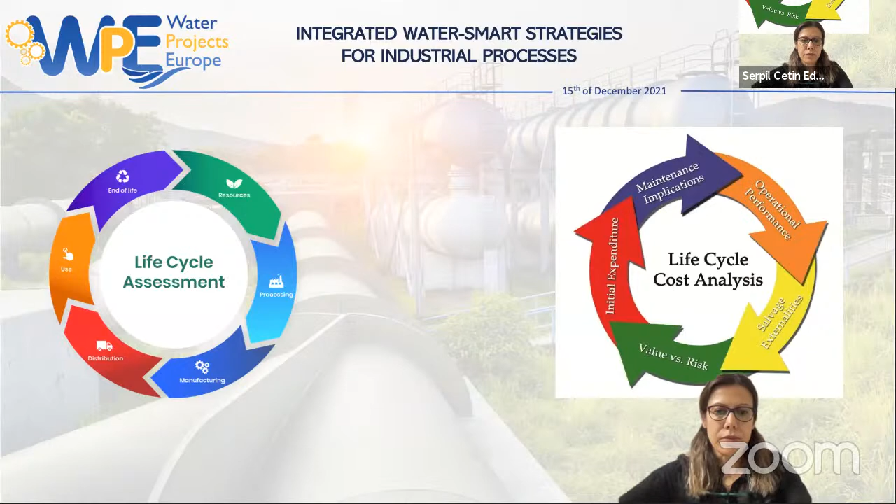According to an article published by Wall Street Journal, about 500 gallons of water is used for the production of a single pair of jeans. This number increases up to 1.3 trillion gallons of water per year annually for fabric dyeing processes alone. So we can say that 20% of global industrial water pollution comes from textile manufacturing.

In addition to these problems, there are also some barriers, technical or non-technical, for reuse in circular economy. One of them is that retail brands want to remain one step removed from what is known as textiles' dirty secret. But Waste to Fresh will engage zero discharge of hazardous chemicals programs with large brands to promote the positive impacts of the Waste to Fresh system and its overall value proposition, so that they can influence textile manufacturers to adopt the Waste to Fresh solution, helping to change public opinion about large retailers with respect to textiles' dirty secret.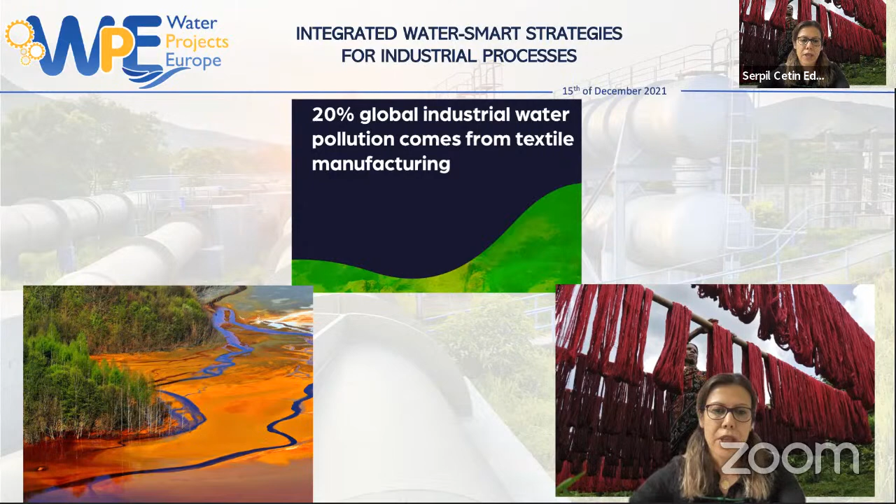Another barrier might be opposition to the adoption and use of new technology, in this case nanotechnology. Some activities in the project are dedicated to ensuring health and safety aspects are built into the design, development, and operation of all process units combined in the closed-loop recycling system based on nanotechnology. This will ensure Waste to Fresh meets relevant health and safety regulations, helping to facilitate certification of the system to relevant standards and hence speeding up adoption.

Finally, environmental government policy in Turkey and other target international markets such as Asia Pacific and South America could have a centrist philosophy wanting to treat all wastewater centrally rather than at source on site, and this could hamper the rollout of the solution. But in this case, Waste to Fresh will show what can be done at the local level through the demonstrator, and perform both LCA and LCCA to provide evidence for the cost and effectiveness of the solution.

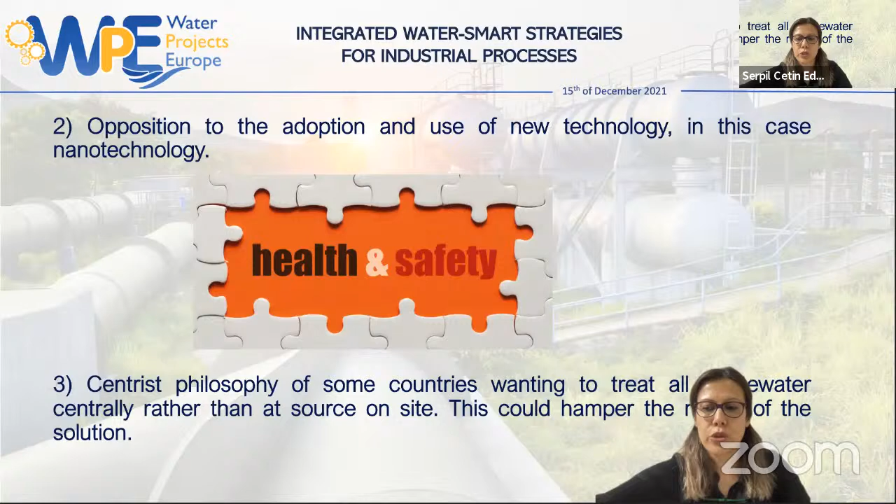When we look at the new circular economy action plan, we can see that textiles are the fourth highest pressure category for the use of primary raw materials and water, after food, housing, and transport. Also the new water reuse regulation in the circular economy action plan will encourage circular approaches to water reuse in agriculture, and the Commission will facilitate water reuse and efficiency, including in industrial processes.

Starting from this point, we can say that the Waste to Fresh system will be designed to remove organics, heavy metals, and salt, allowing each of these to be upgraded as far as possible for reuse. The water will then be recycled for reuse in the factory, following the principles of the circular economy. The energy sustainability for the photocatalytic process unit and other components will be enhanced by using a renewable system of energy generation and storage with appropriate control systems to provide the circular energy needs for operation.

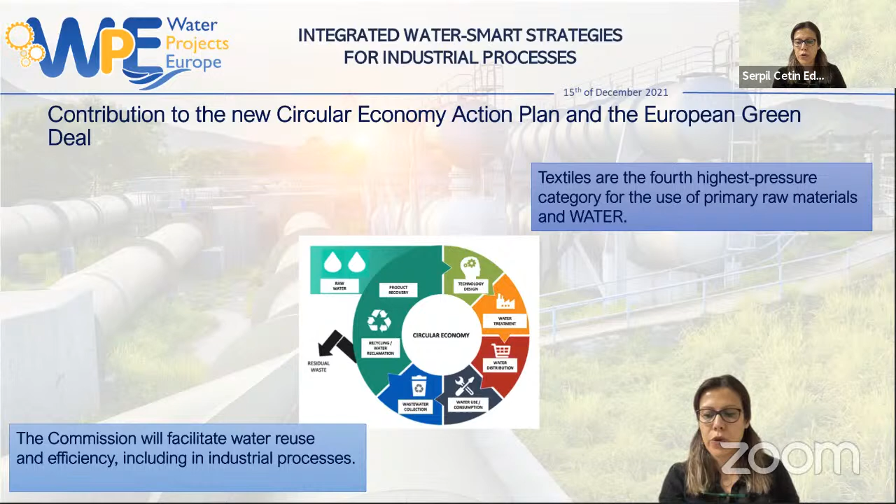In terms of water policy relevance of Waste to Fresh, the proposed integrated solution fits the circular economy model, as the treated water will be reused within the factory, whilst the other extracted resources such as organic salts and heavy metals will feed into other valuable applications. For example, salts reused in the same or other dyeing processes.

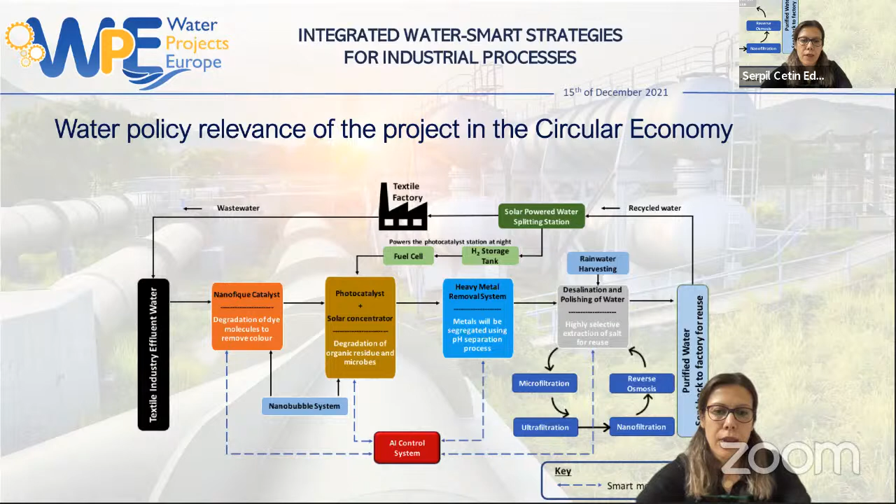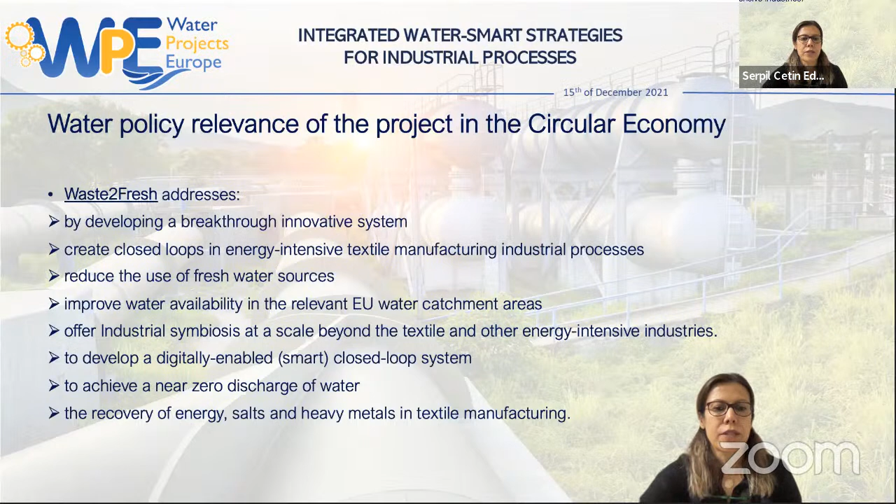In terms of water policy relevance, Waste to Fresh addresses the circular economy by developing a breakthrough innovative system, by creating closed loops in energy-intensive textile manufacturing industrial processes, by reducing the use of freshwater sources, by improving water availability in relevant EU water catchment areas, by offering industrial symbiosis at a scale beyond the textile and other energy-intensive industries, by developing a digitally enabled, smart closed-loop system, and by achieving near zero discharge of water and the recovery of energy, salts, and heavy metals in textile manufacturing.

As a discussion statement, we can say that I believe we will achieve as a consortium these expected results throughout and at the end of the project. And we hope the Waste to Fresh system will be applicable not only to the textile industry, but also other energy intensive industries.

And at the end of my presentation, I appreciate the opportunity to speak at this clustering event. Thank you very much, Serpil.

Crystal clear presentation as well. I think that today we learned a lot from these 5 great projects, and now we enter into the discussion. So I want to open this discussion with some remarks.

I find that each and every project approaches circularity with common pathways, with partial overlapping. But I have a question: in order to achieve circularity, should we think to start from the design of industrial systems, should we be circular in the design rather than after, or run after circularity once we already have a system for which circularity could be difficult and require investment? So the question is, are your projects also thinking about how to make a difference, not only in creating circularity through symbiotic activities and synergic actions between different industries, but also achieving circularity starting from the industry design or process design, from the very beginning? The floor is open - this is a question I'd like to address to each of you.